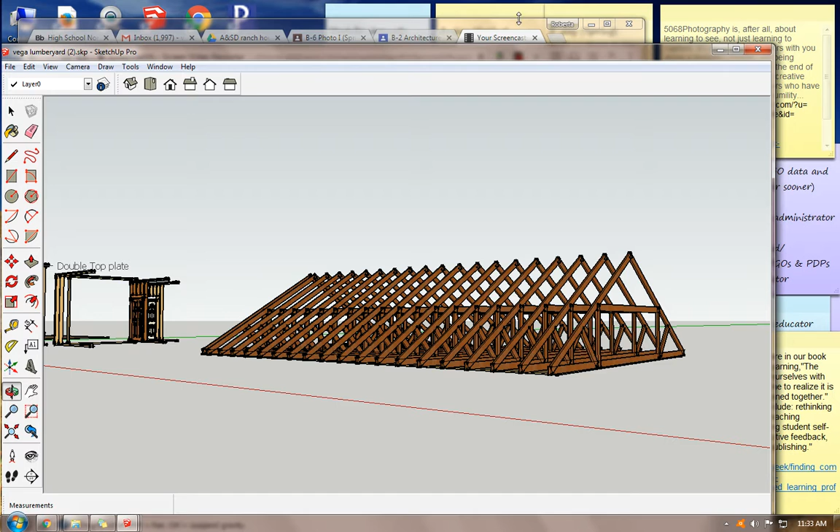After you have created all of your roof trusses and spaced them across the top of your roof, you're going to need to add a center beam, and also, according to your instructions, you're going to add a roof platform, and put some shingles and things like that on it. So let's start with the beam.

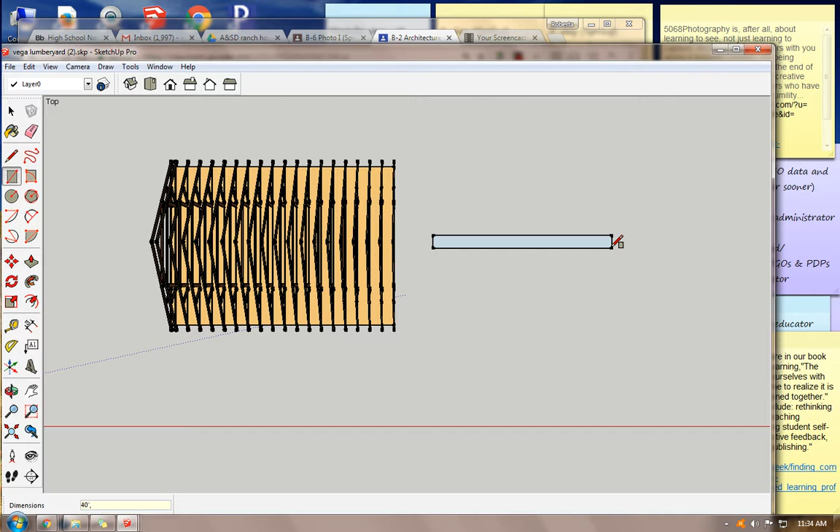Let's go to the top view. We know that our house is 40 feet this way. So I'm going to draw a rectangle over here, and I'm going to make it 40 feet long and 4 inches wide. And I'm going to make this a component and call it roof beam.

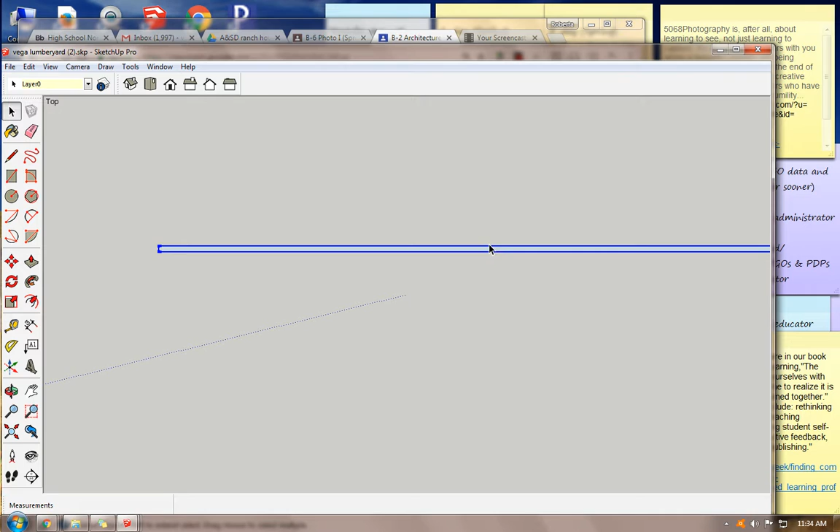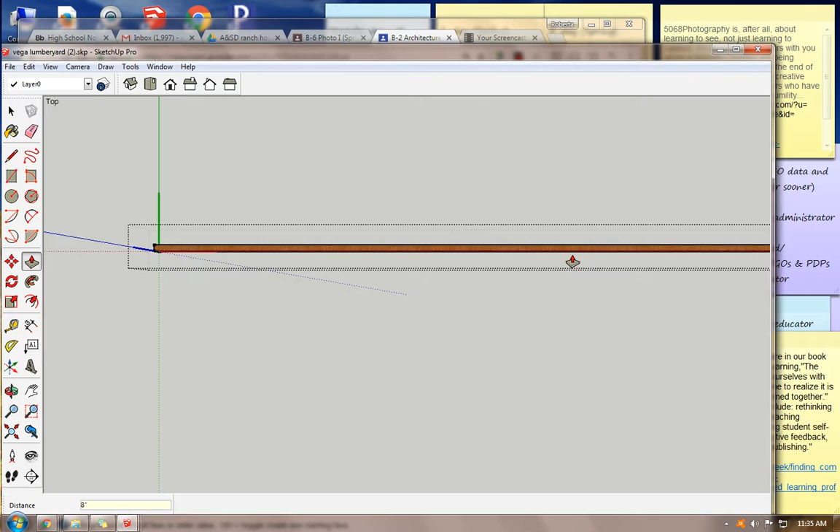And then I'm going to take this center beam and pull it up. Well, let's give it some wood coloring first. And then pull it up 8 inches. So I have a beam that's 40 feet long, 4 inches wide, and 8 inches high.

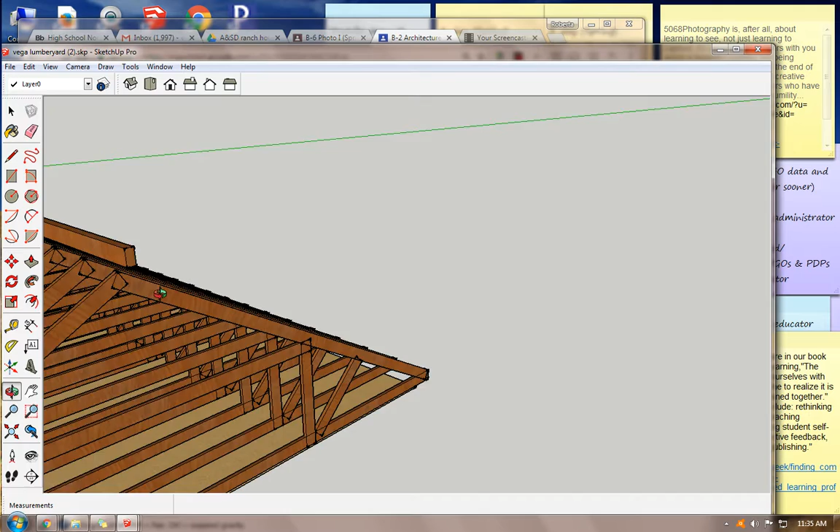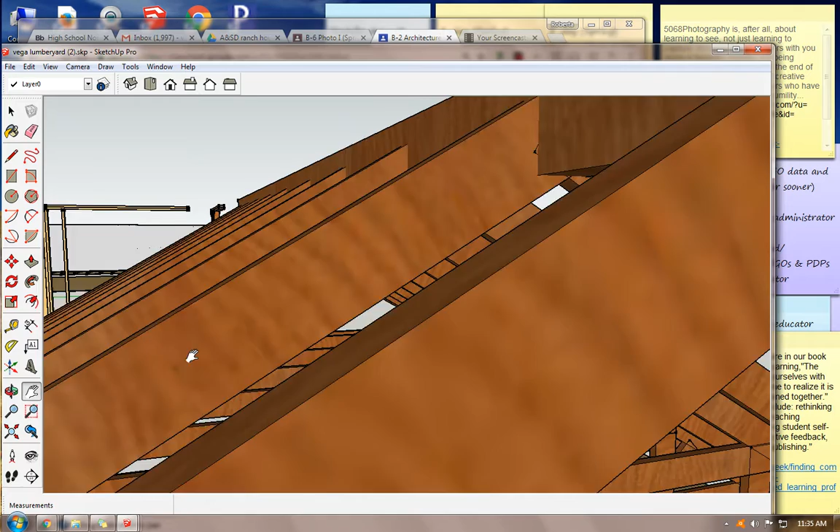I'm going to take this beam and use the move tool to move it into position so that it is up in the center of my roof trusses. So I need to move to the end here and grab it, zoom in, and just position it. See, mine's a little bit off center, so I need to zoom in and find the end.

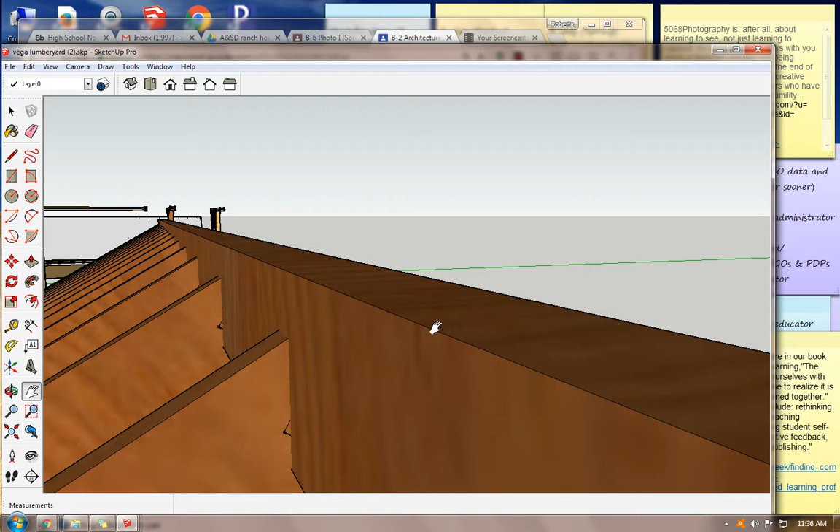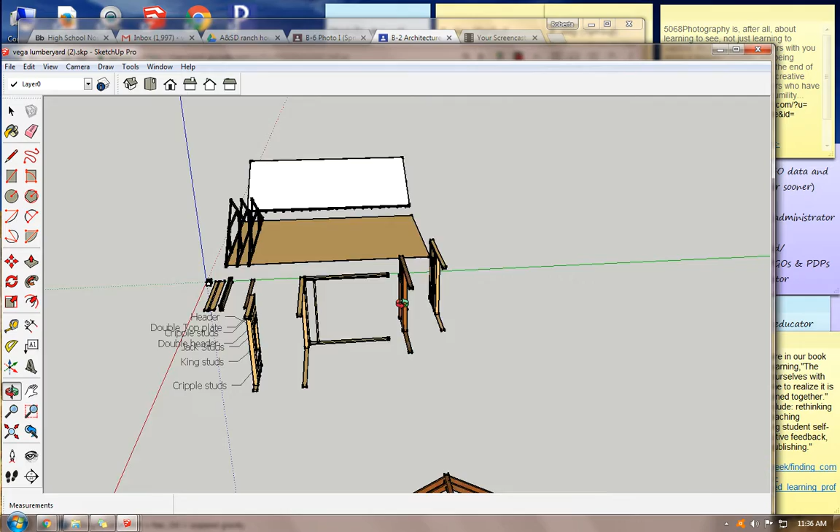Zoomed in a little bit too much, so now I have to zoom out a lot. But I do want to be right on that edge. Let's try and move this centered over here so we can see it a little bit better. Getting dizzy yet? Sorry about that.

All right, let's try this again. Grab it and use the move tool. You want it to be as centered as it can be. I'm using the little red pluses there to help me center it. There we go. All right, so now my beam is centered. I'm actually going to pull it down a little bit more. I want it to go straight down. There we go.

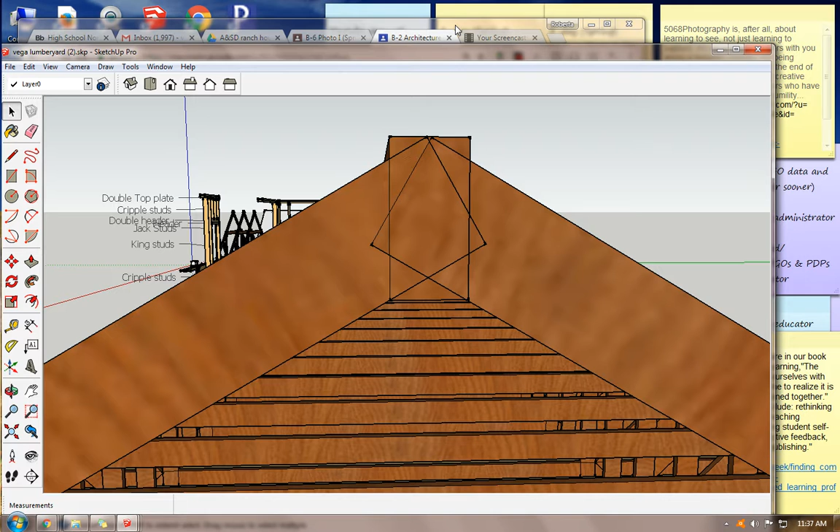All right, now I have to add some sheathing to the side of the roof in order to put down my shingles. Before you put the shingles, there's an underlayment layer. There's many ways you can do this, but I'll just show you one way. Let's go to our layers, and we want to create a layer, and I'll call it roof underlayment. Just make sure that I have that layer active, and that's what's showing up here.

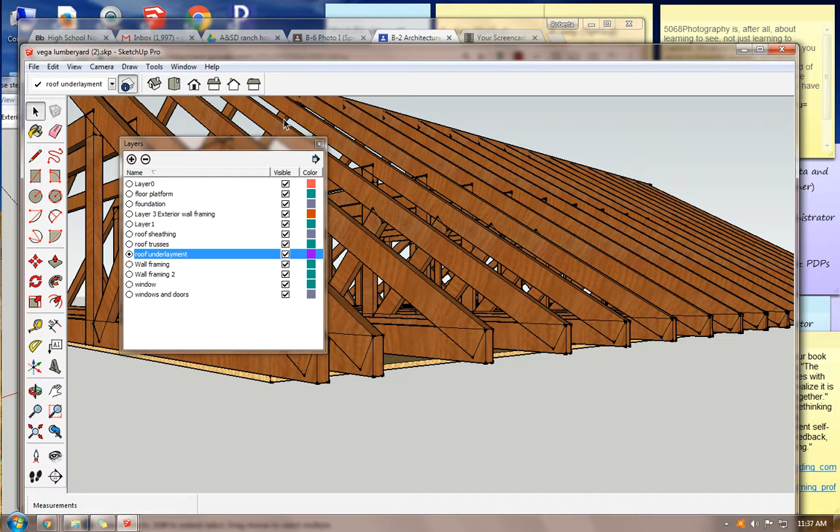And I'm going to start by making a rectangle. Again, there are many ways you can do this, but I'm going to make a rectangle. I know my house is 40 feet long, and I know that these are 6 inches high, so I'll make my rectangle 40 feet, comma, 6 inches. I will make that rectangle a component, call it roof underlayment.

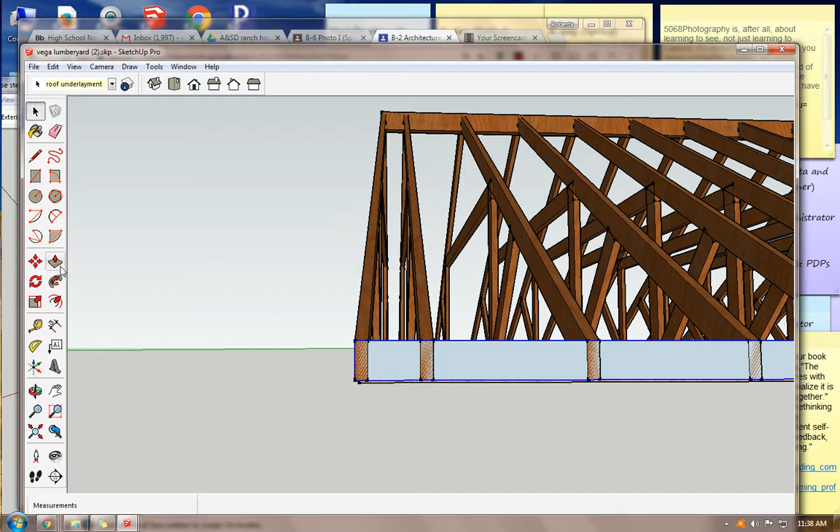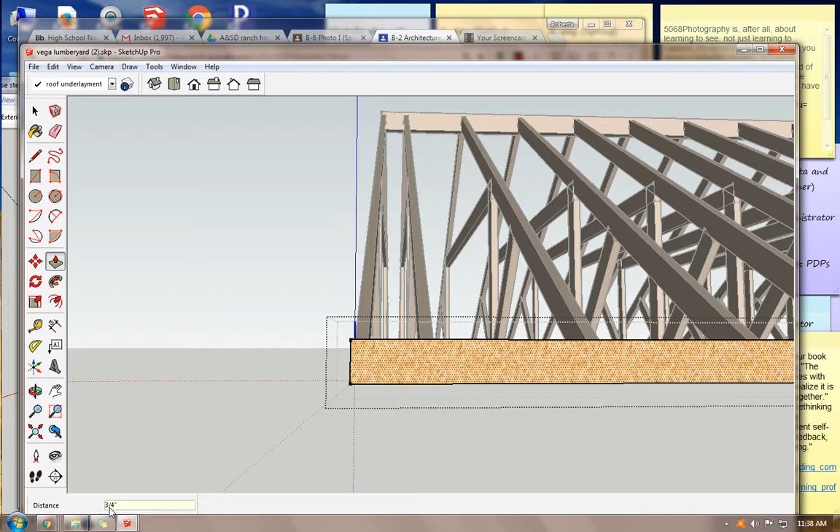I'll fill it with a wood color that's appropriate. And I'm going to use my push-pull to pull it out. A typical thickness is 3/4 of an inch. So I'll type 3/4 inch. And you'll notice my distance is showing up down here at the bottom of the screen. 3/4 of an inch. And hit enter.

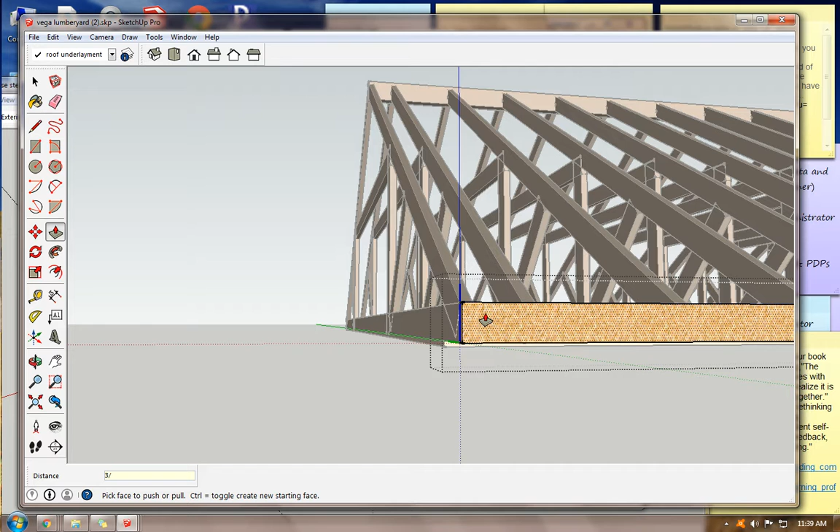So, and forward 3/4 inch, enter.

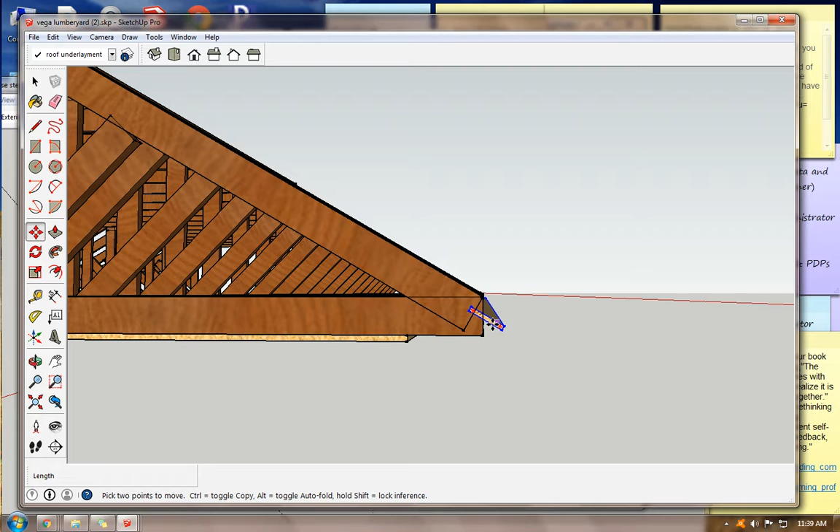I want to flip this. This is not in the position I want it to be. Of course, I want it to be laying alongside of this. So I need to do a little bit of math and figure out that the angle needs to be 60 degrees. So let's select that, go down, turn it, and type in 60, enter. And then use my move tool to move this into position so that it sits right on top of that.

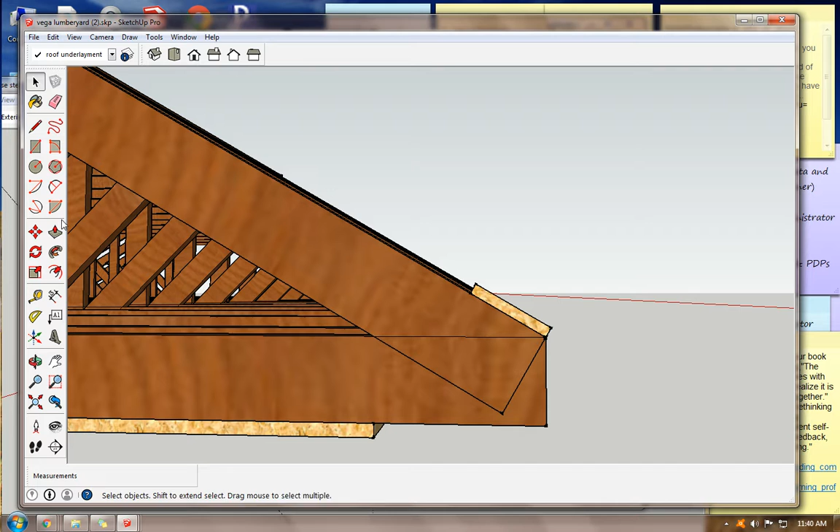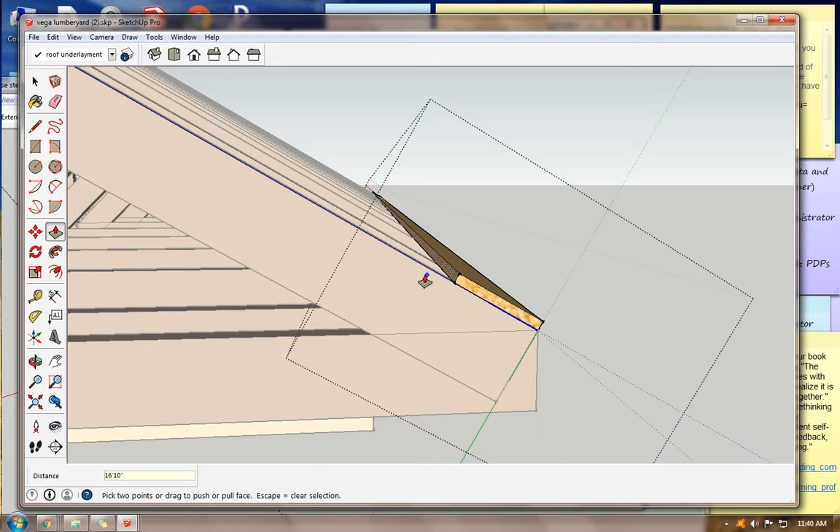Now, I will need to stretch this up so that it will reach up to the roof. And I've done a little bit of math ahead of time. And if I select this edge and begin to extrude it with the push-pull tool and type in 16 feet 10 inches, no comma, that should just about take up this whole side. And it does. It brings me right to the center here.

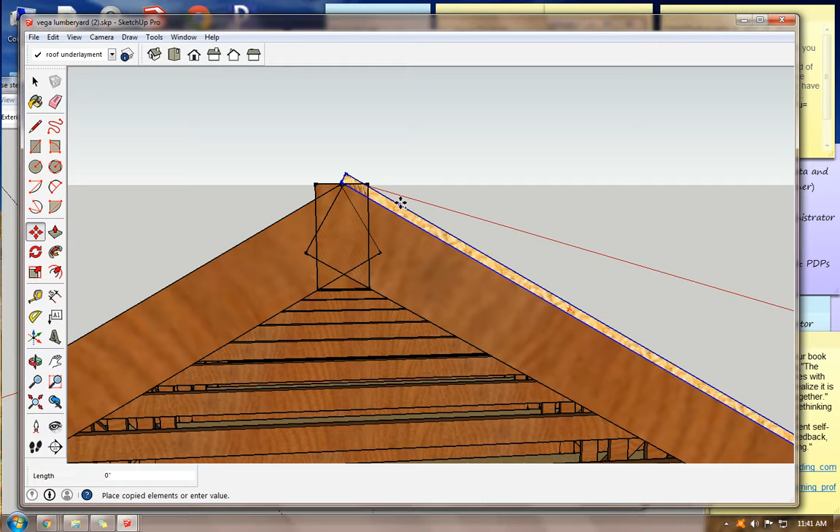This is going to be my underlayment. I'm also going to have a layer for shingles, but I'll do that separately. I'm going to take this and control move a copy up, so this is my underlayment for my plywood, and this is the layer where I'll put my shingles.

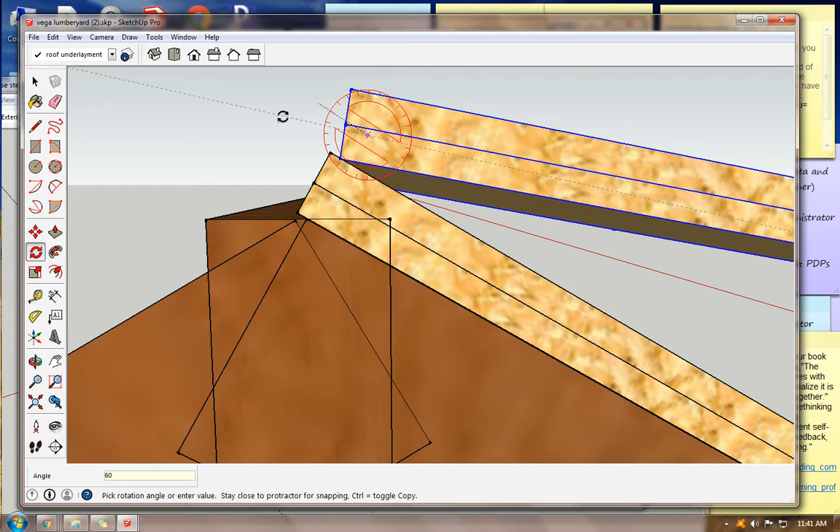Now I'm going to need the same thing on the other side, so I'm going to select both of them by holding the shift key down, control move, and I'm going to rotate both of these 60 degrees. And now I'll need to move these so that they just line up with the other two that I just created, and meet at the center there.

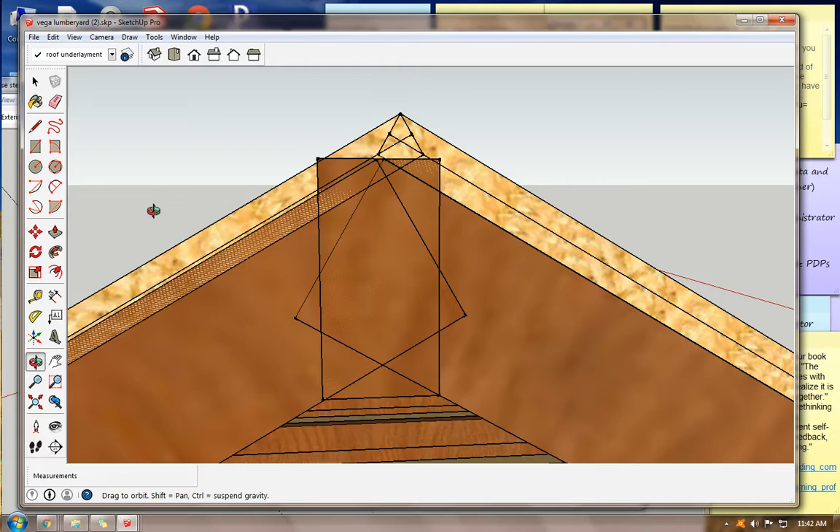Okay, so now I've created my two layers. I'm going to take my top layer. Actually, I think I would like to move these two out just a little bit more. Move them over a little bit more. There we go. All right.

And then now I will move my center beam up so that it will cover that gap in between there. I'm not going to waste your time while I line this up perfectly, but you get the idea of how we want this to be. The beam should not extend above the plywood or the shingles, so I need to make sure that I move it down.

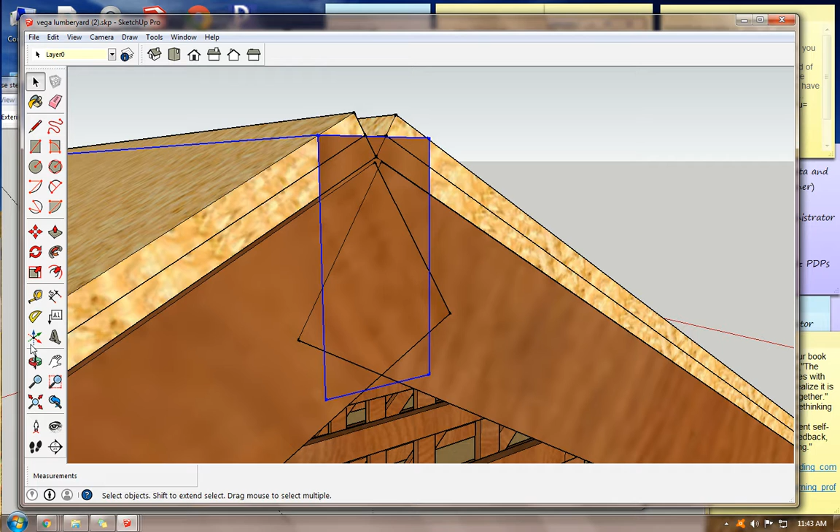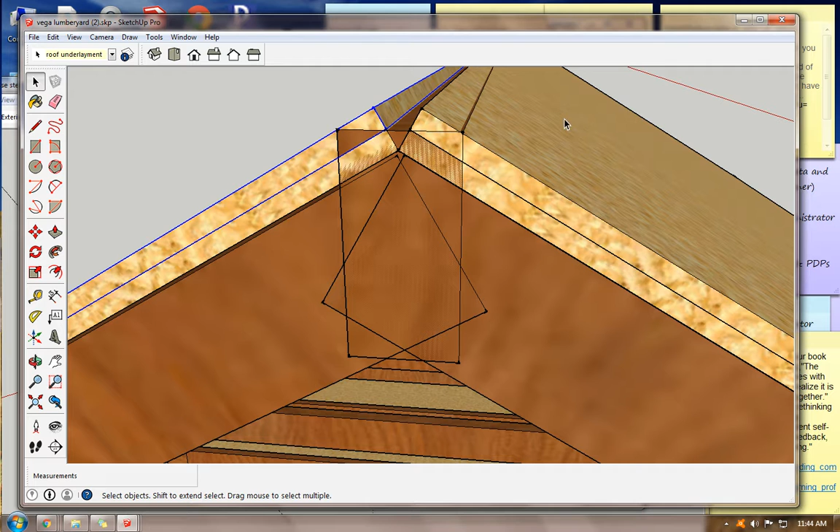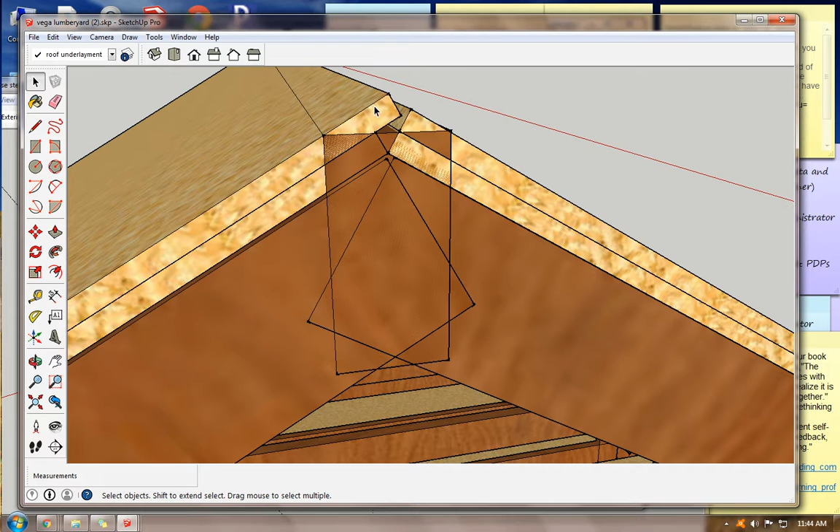And that's still going to leave a little gap in the middle there. So I'll need to extend these two upper pieces a little bit more until they meet. I'll make this one unique. And I'll take this one and make it unique. And I'll pull these two sides up until they close that gap. There we go.

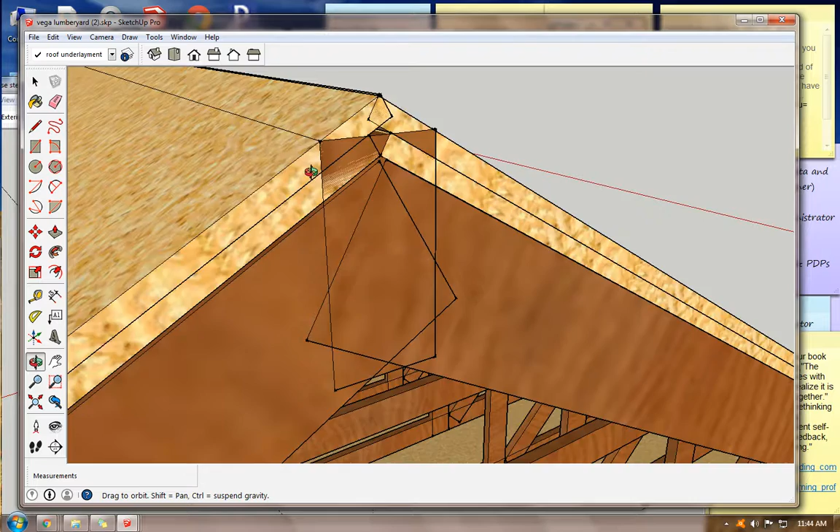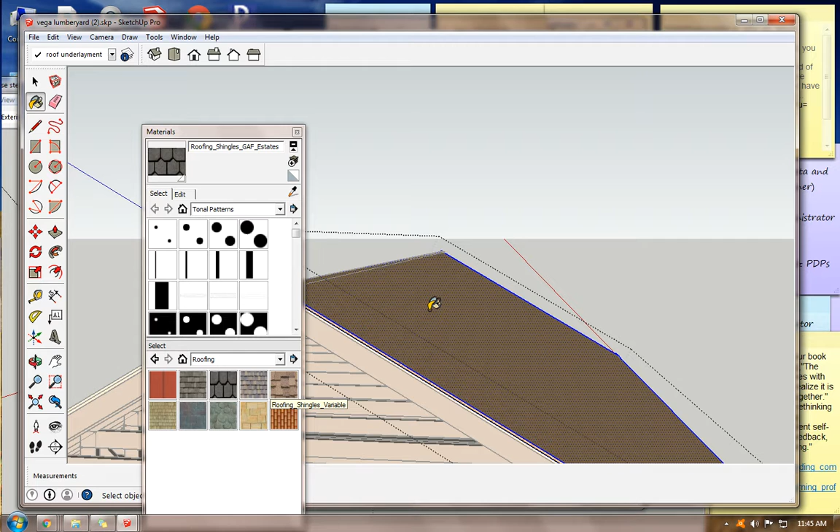All right, so we have covered our gap, and now we can put some roofing material on here. So I'll select my one side here until I get the blue dot showing. I'll go over to my materials tool, and over here I will look for roofing and choose the kind of shingles that I would like to have, and then go to the other side. Keep clicking until I get the blue dots, and then fill in the shingles again.